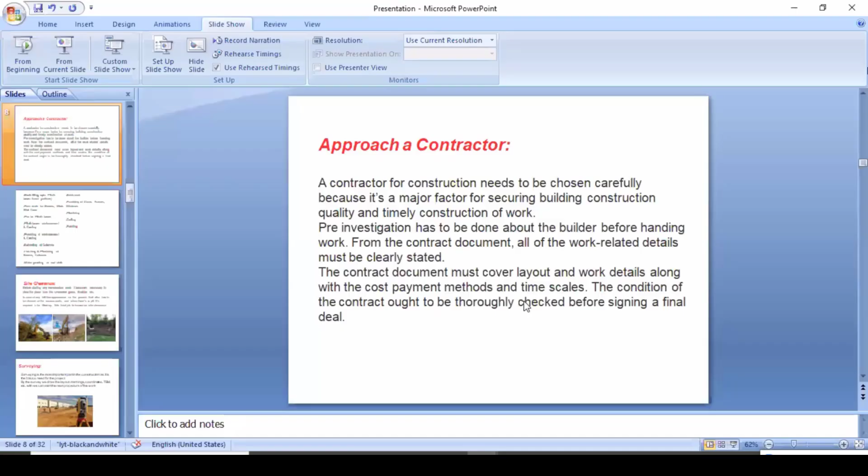So guys, before starting this session, let me tell you about civil engineering. What is civil engineering? It has different streams to go into after completing civil engineering. You have many ways to get jobs, right? Among them are structural engineering, architecture, interior design, and lastly, site work. So today we are going to discuss site-related works.

So how are we going to execute the work on site from the drawings given to us by the structural or interior and architectural team? How are we going to execute the drawing or plan given by them on site? Basically, when we are studying civil engineering, it's totally different from when we come onto the site. The IS standard will say we have to do some points according to this standard, but practically on site, some points you can't do.

Means you can't go through IS code when you're going practically. So sometimes you have to negotiate with this thing. So step-wise procedure I will explain you. Actually, this session is about piling foundations. So before starting the piling work, I will explain you what is the procedure before starting the work.

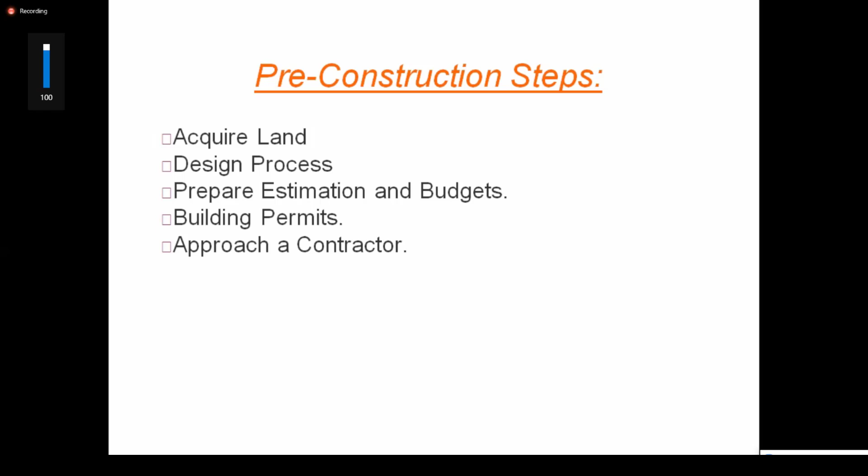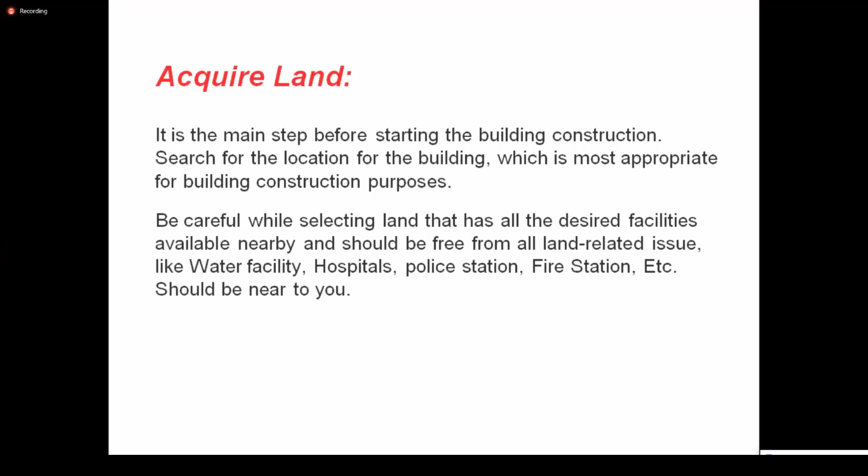So first, acquiring the land. Actually, it is the main step before starting the project. So here you will be seeing all the topographies, whether the land is proper for construction or not, whether the site is in good location, it is not in remote area. So what is the ground water table level, and whether it is near to the police station, hospitals, fire station, and your daily requirement needs. So as per the norms, it is properly suited to you or not.

After confirming your land, you will be going for design process. So after getting land, first of all, you will be thinking what I have to construct in this. So accordingly you will be preferring that land. So after that, you will be in the process of designing. So you will approach a structural engineer or an architect to get a design from them. So what are your requirements?

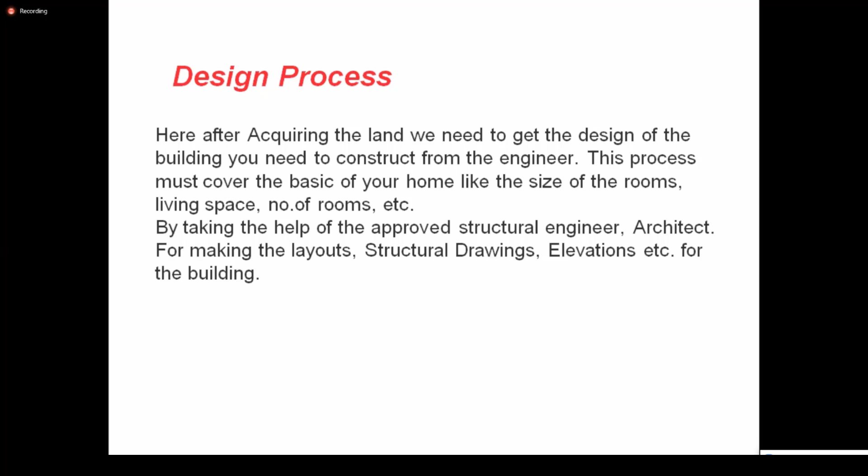For example, now you are going to construct a hospital. So for that, you need emergency services ward separately, normal OPD separately, and some general ward, everything. So for that, you need to approach a design. So you will be in total procedure of design. After that, the preparation of estimation budget, right? So you have decided to build a hospital. So for this, you have to estimate it.

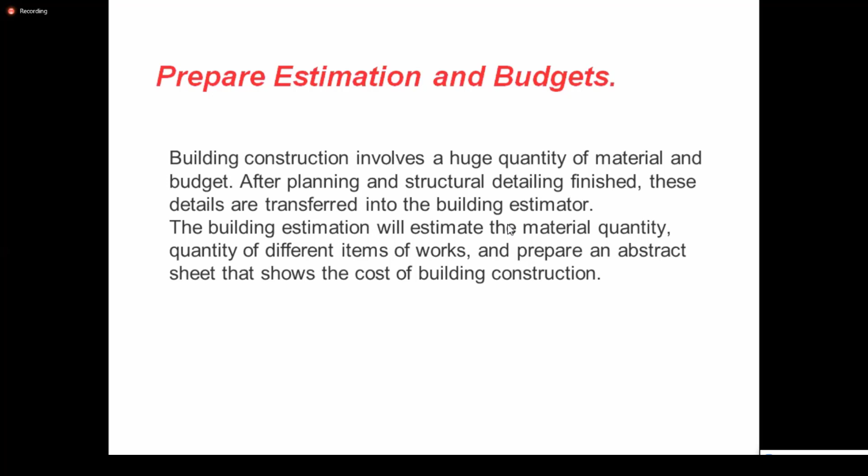Am I preparing a super specialty hospital or multi super specialty hospital or else ordinary hospital or some specialized, depending upon the variations. So whether I need to construct it in a 3-story building or a G+4 or G+5. So what is the estimation? What is the budget I have to put? According to the financial thing, you have to design, think and estimate it. Right. After preparation of estimation and everything, you will be going for building permits.

So why? Because before starting the construction, you have to get permission from the local authorities, like the municipal corporation, pollution control, airport authority, and police station, whether the land is proper to construct or not, whether the land is for construction purpose or for agricultural purpose, and so on. For that, you need some documentation.

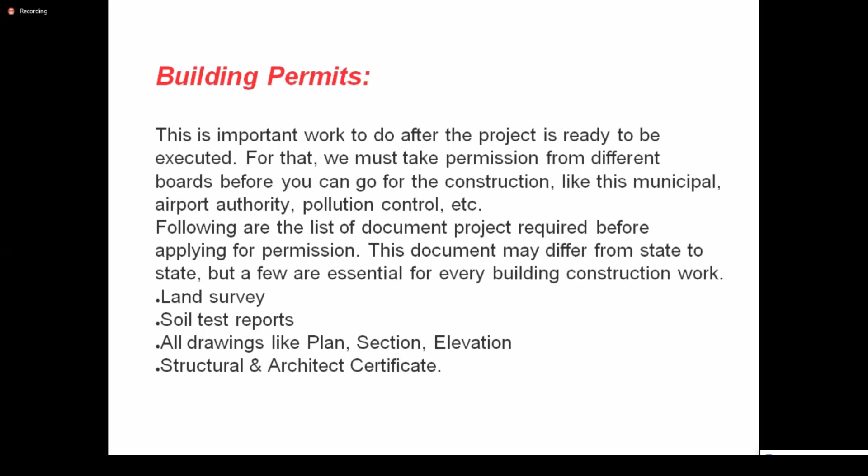Before that, obviously, you will be doing the land survey and soil test reports. In the soil test reports, you get the details of the land, whether it is good for construction or not, whether it is sandy soil, which is not good for construction. After that, all the drawings, as you already met your designer team, you will be showing all the designs, whether they are as per government rules and regulation norms and according to municipal norms. After that, showing all the documents to them, getting approval and getting all the permits.

Next thing you are going to approach a contractor. If you are building a small house, for example, your personal house, you will be going to a local builder or contractor and negotiating with him. Apart from that, for example, you are an employee from a company. By single you can't build a building. You need manpower. That means you have to get it from a labor contractor, to supply labor, to supply manpower.

Or else your company wants to give that work to a subcontractor. So you will be approaching a contractor to take that work, to clear all the documentation related things, to provide his own manpower. He will be seeing all the things if you are giving it to a subcontractor, right?

Meanwhile, in this session, is anybody from North India?

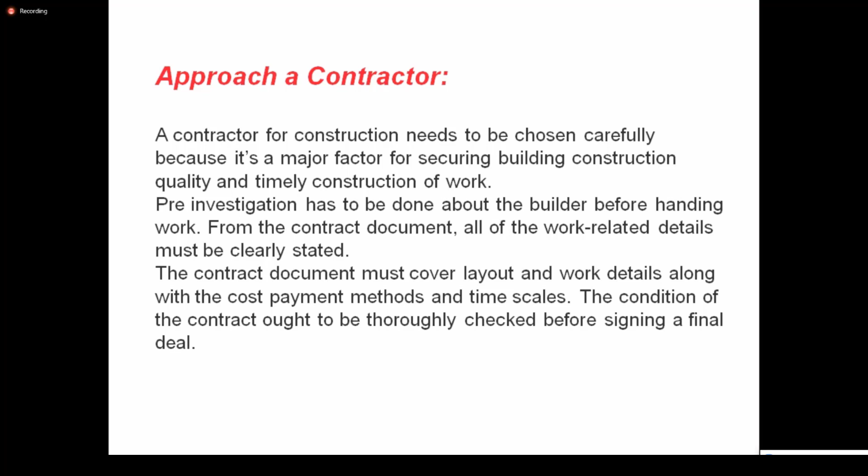We will be observing everything as a client. So for that you will be approaching the contractor, right? After that, the paperwork, everything has been done. Now before starting the construction, you have to clear all the documentation. That means you have to get clearance from the client.

Now you got a tender about some building. For example, for X building, you got a contract. That may be from a public sector or private sector.

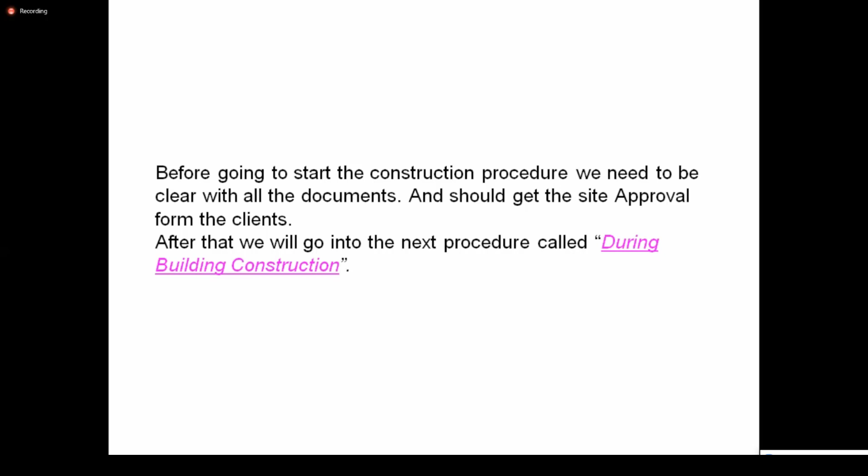Everyone will be choosing different streams, right? So after completing everything, you will be going into the building procedure. Before starting construction, you have cleared all the documentation and you got all the clearance from the client. Now you're ready to start the construction. So before construction, you need a site clearance. Up to now, you got clearance from the client: yeah, okay, you can go and start the work. So for constructing, you need a site clearance.

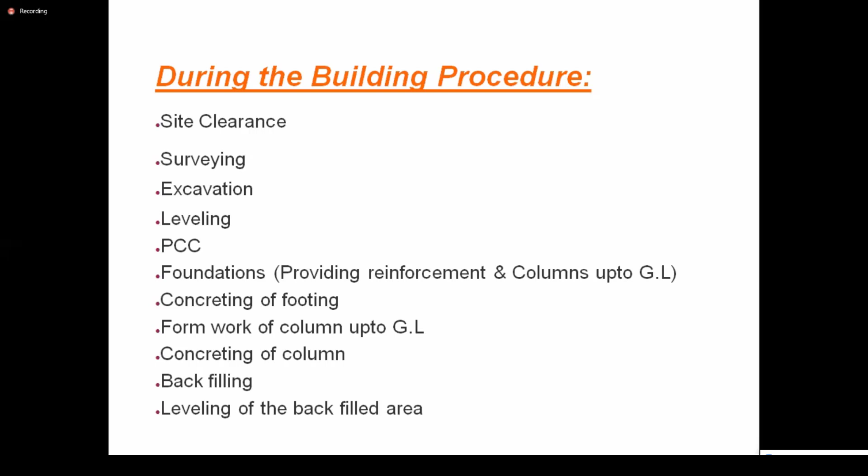What is a site clearance? See, the land you have chosen may be filled with debris or bushes, or some hilly areas, uneven surfaces like this. Can everybody see my screen now? So you can easily see. Sometimes 80 to 90% of clearance will be in the scope of the client. So the client will clear the site and hand it over to you to construct the building. Sometimes 10 to 20% of the site clearance will also be in your scope, according to the tender.

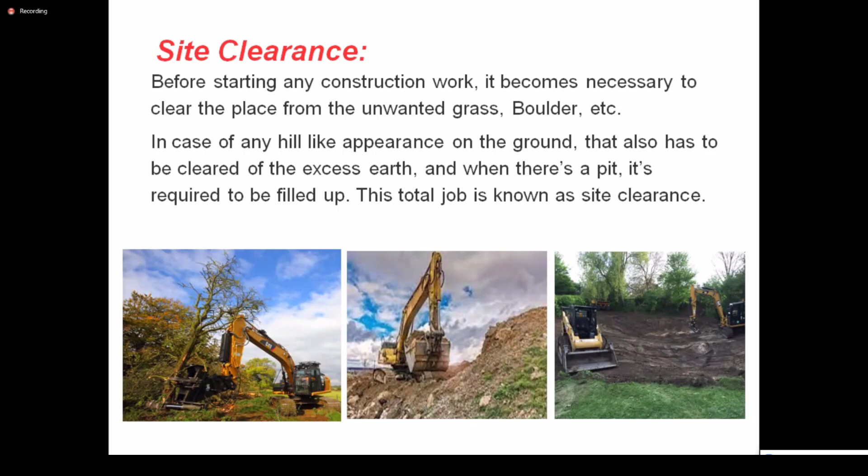After completion of site clearance, surveying. This is the basic and major part of the work of the building. So now, for example, we have taken a hospital. For example, you are constructing a small 1 to 2 story hospital building. For this, you no need to prepare a big layout.

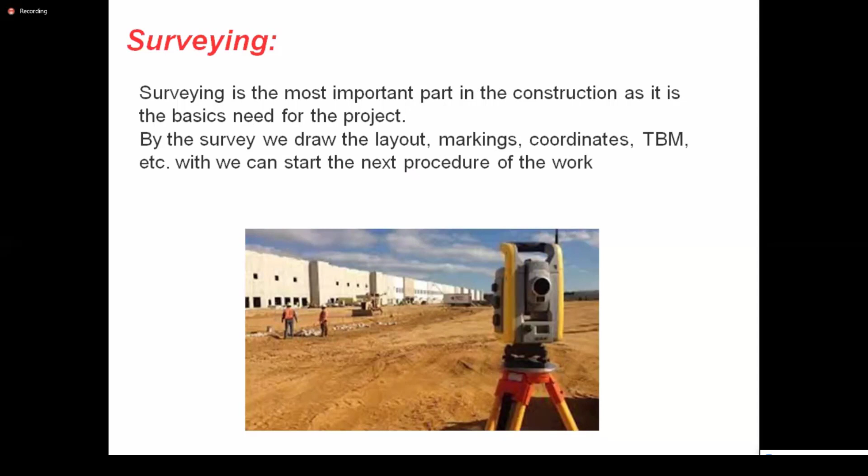Normally, you will be surveying and preparing all the layouts around the boundary and preparing all the coordinates. Right. So here, you will be doing all the surveying works, the basic requirements, like this layout, marking the areas, fixing the coordinates, getting the temporary benchmarks with the total station, obviously, before starting the work.

Because here a huge building is coming, some G+8 floor building, they are ready to construct. That's why they are excavating all throughout the layout. Normally for G+1, G+2, there's no need to excavate all those areas.

Simply you will be doing column marking, adding some working space to that column marking, and starting digging up to 1.5 meter, 2 meter, up to the required depth, and starting construction. So no need to excavate all the area, depending upon the building you have chosen.

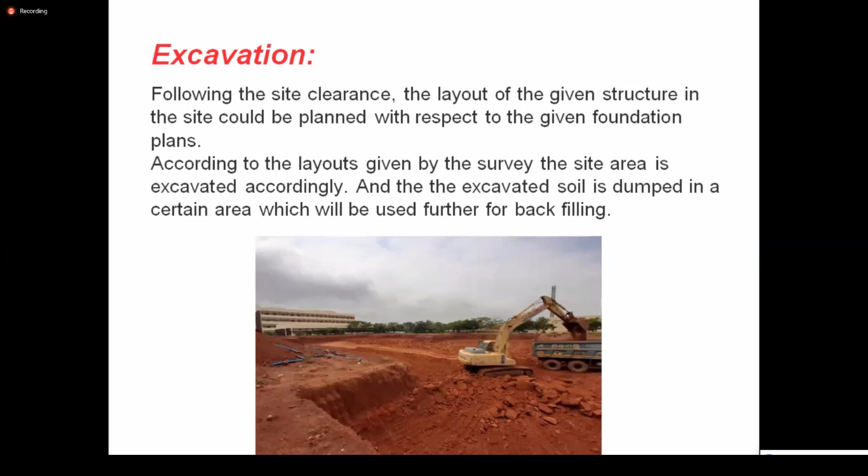After completion of the excavation, you will be doing the leveling. Leveling here comes in 2 types. For example, for construction of a hospital, the designer has said you have to excavate up to 3 meters, and from there you have to prepare a foundation and build the hospital. Up to 2.5 meter, you have excavated freely.

At that time, you have to be conscious. You have to look very carefully. You have to excavate properly at the ending of the layer, up to 3 meters. Here he is checking whether that area has reached 3 meters or not.

After that completion, you will be doing leveling. So now you have excavated the area up to 3 meters. After that, since you have done the excavating with an excavator or JCB, with machinery, you can't get proper leveling. Of course you will get some undulations, some uneven surfaces.

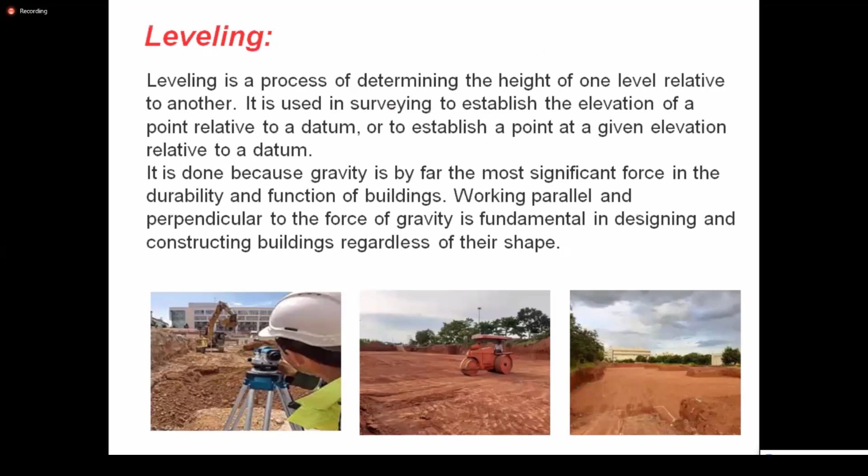So to avoid direct contact, we are doing PCC. As previously told, we have to do proper leveling.

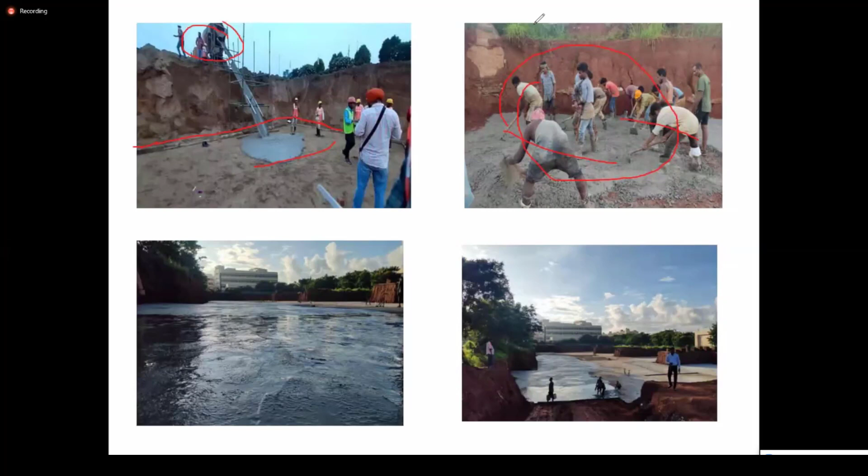Okay, after that we will go to the next stage. After completion of PCC, the next thing is column marking.

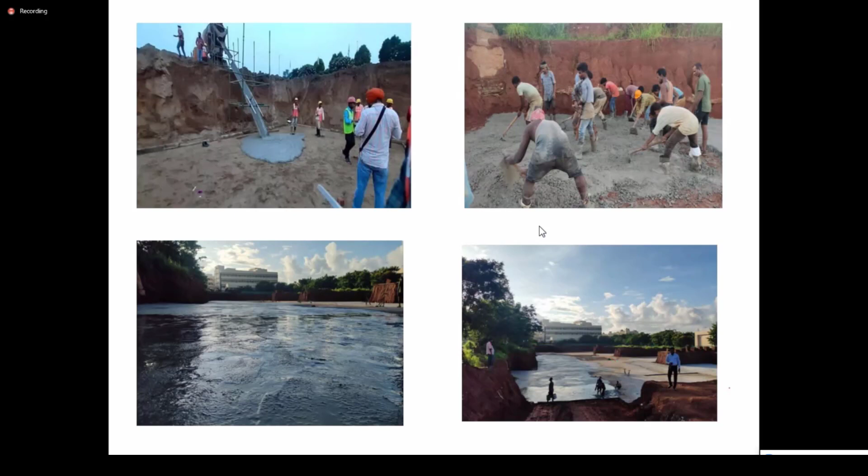You can see in this area, after completion of PCC, we will start doing column marking, marking where we have to place a column. After that, we will start for column marking.

So when we come to the foundations, again it will be divided into two parts. But before going into those parts, what is the foundation? Let's talk about foundations now.

Basically we need a basic foundation. This is the foundation. So in civil terms, what is a foundation? It is a huge structure, not necessarily huge, depending upon the structure. It is the main part of the building from which all the building loads are transferred to the earthen surface or to the soil. That's why it should be very strong and done with proper specifications.

So when we go into that part, it is totally divided into two parts: one is shallow foundations and another is deep foundations. Let's consider shallow foundations first. Shallow foundation is the foundation used to transfer all the building loads to the soil, or to the bearing capacity of the surface.

If the range of depth is increased, we go into deep foundations, which we will discuss later. So shallow foundations are divided into four parts.

One is individual footing or isolated footing, another is combined footing, the third is strip footing, and the fourth is raft or mat footing.

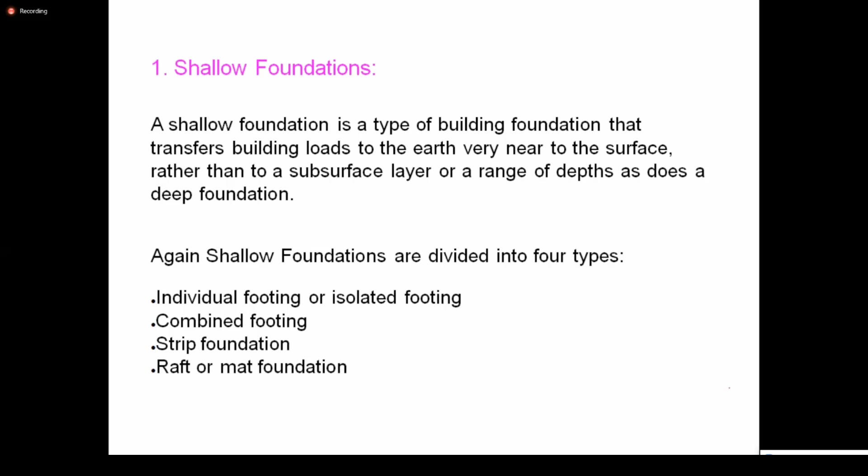Previously in the image, they were preparing the PCC, right? The PCC is for raft footing. Okay, let's go for individual footing. You can see it is individual footing, right?

So what is an individual footing? Individual footing is used for small structures of a building. As I told at the start, during surveying and excavating, if you are constructing a small building, no need to excavate the overall layout area. Simply you will be marking where your column is coming. So at that point only you will be excavating, and there you will start construction of the foundation. So at that time, this individual footing will be used.

After that, this is called individual footing. You can see it in the image.

See, this is an individual footing. This footing is prepared for a boundary wall. So here, from there, a boundary wall is constructed. Normally for individual footing, it will be coming the same for all the buildings. This is the same procedure for all of them.

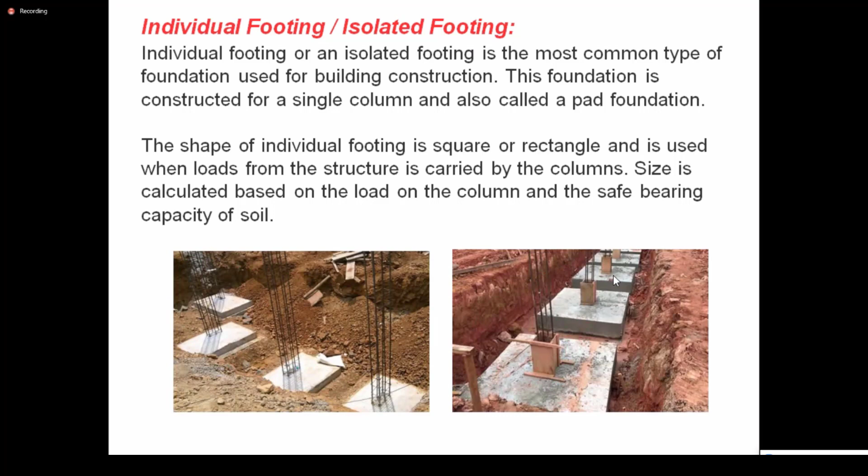So after that, coming to the point of combined footing. What is a combined footing? It is also the same, it will look like individual footing, but when you are getting columns from two or more columns, then it is called combined footing. It is constructed when two or more columns come together, that is called combined footing. That means the isolated individual footings are constructed combinedly.

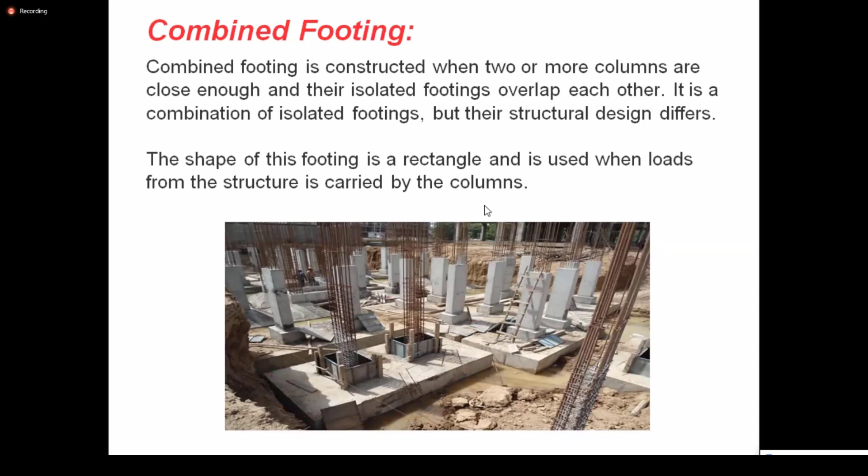After the completion of combined footing, you will be going for strip foundation. This foundation is constructed very rarely, especially where we have huge walls like retaining walls or bridge piers. For those things only we construct this strip footing. That means below the ground level we will be doing that, constructing a wall of up to 3 meters.

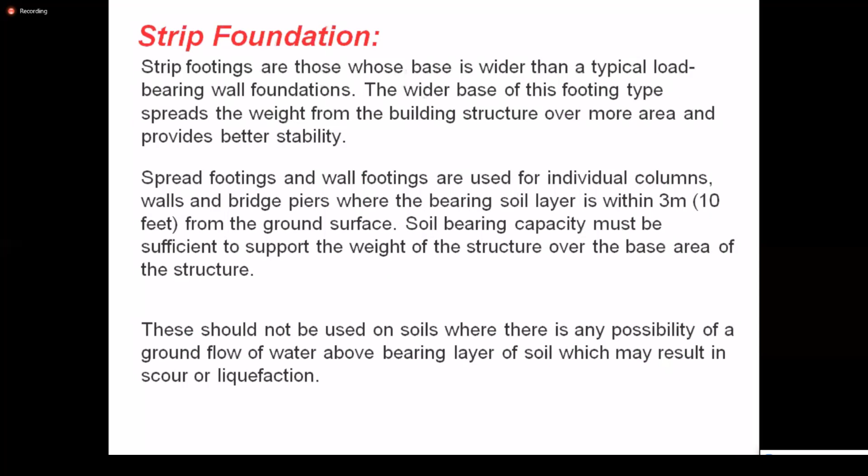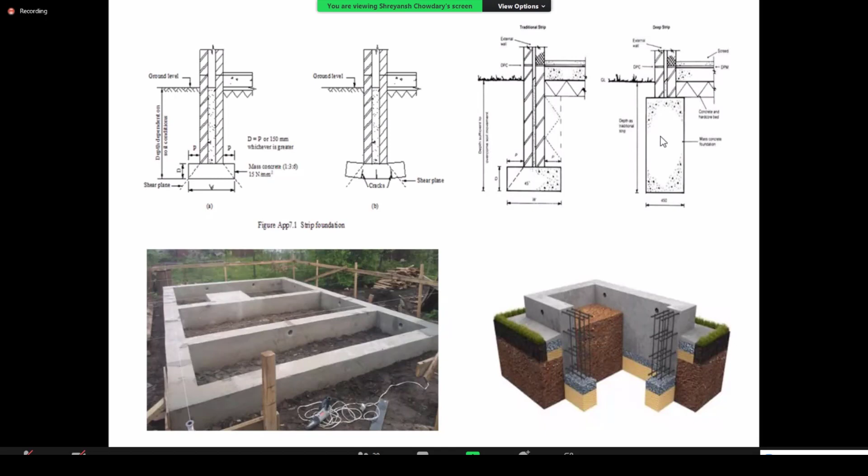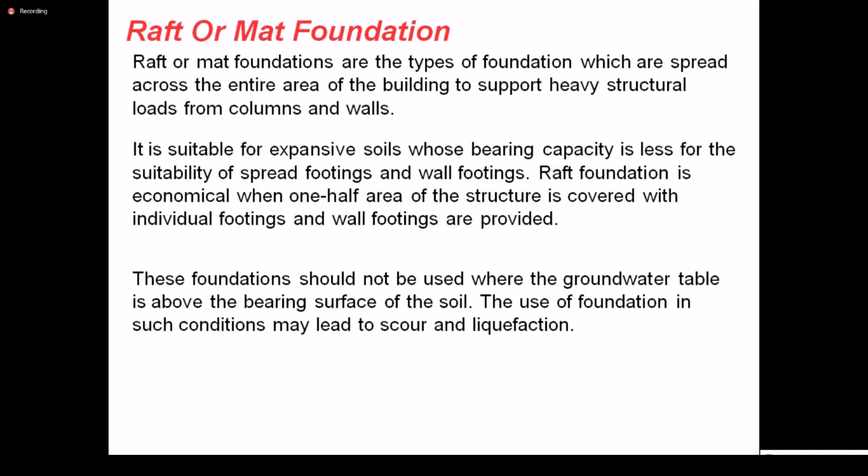At last, the fourth one, raft foundation or mat foundation. It is a huge structure, huge foundation used for big, taller buildings. For example, as I took the example of constructing a hospital, now we are using raft foundations because raft foundation is the biggest foundation, which can equally or uniformly distribute all the loads of the huge structure to the ground surface, the soil, or the earthen part with a low bearing capacity.

You can see, at the start I showed you they are excavating this area. So this is the area they excavated. After doing PCC, they're laying all the reinforcement. After completion, see these main bars and distribution bars. After providing all the reinforcement, they're fixing the column. After fixing, they will provide a pedestal footing and the huge structure of footing. See, here we already did this.

Basically this session is about piling only, so I will be explaining, but I will not go into a detailed explanation.

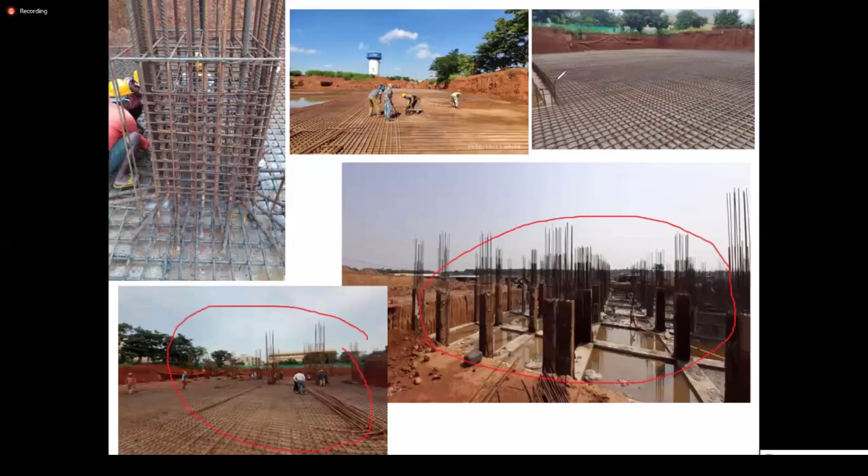After that, how to do the concreting of the footing.

Here they provided all these things. After completing all the reinforcement, after doing all the shuttering and everything, and after checking the surveying, the concreting work has been done. He is providing the vibrator, leveling these things, and checking whether it is going properly or not.

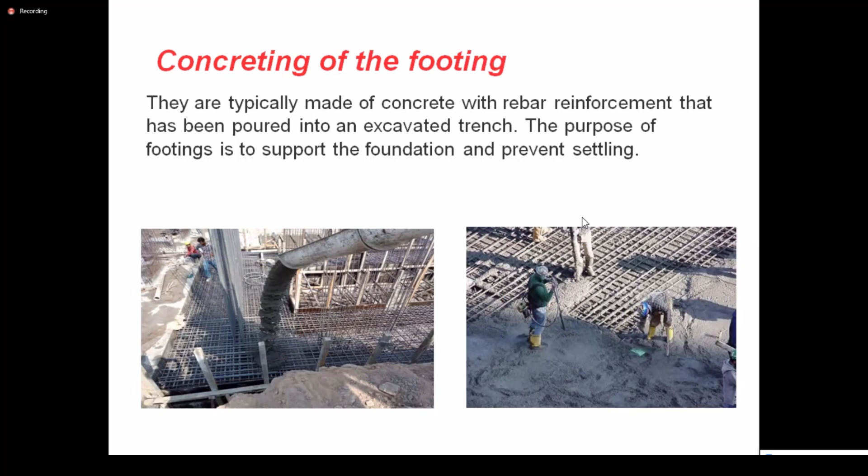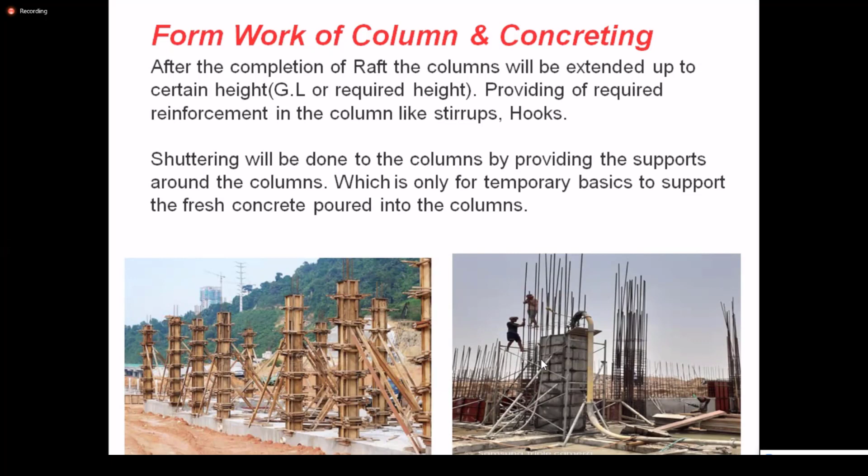After the mass concrete, see the formwork of this one, the formwork of the column and concreting, the shuttering part. Till now we did concrete for the raft. After that we will do shuttering for these columns and we will be doing concrete for this as well.

After completion of concreting of all the foundation footings and columns, again we will do the backfilling. The same soil that was excavated from that area is kept aside for further use, so we use that same soil for the backfilling.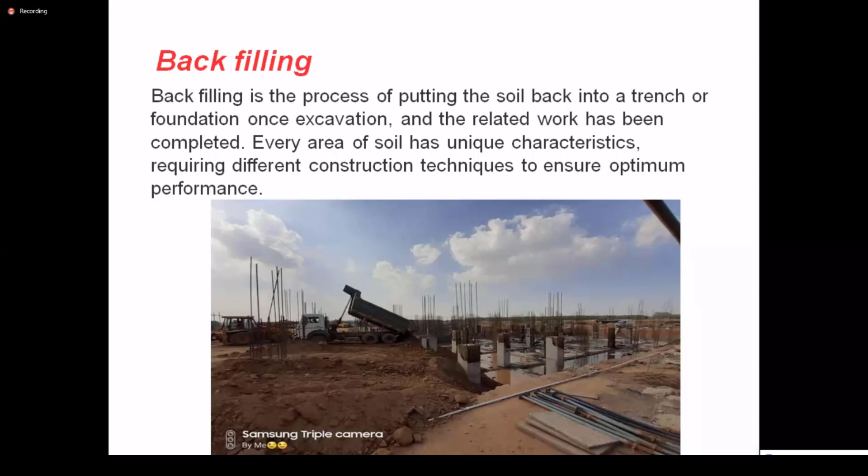After completion of backfilling, we will be leveling that area because once we have taken the excavated soil, again we are filling that loose soil. We have to fill it properly and we have to compact it in 3 layers. Without compacting that loose soil, you will be getting undulations and the building may get chances of cracks, right? That's why we are doing proper compaction within the 3 layers.

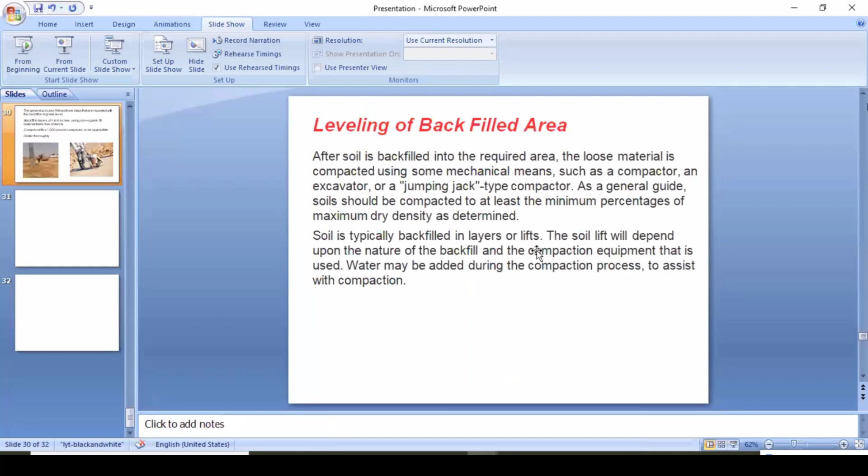So after this, we will be going into the deep foundations. As previously explained, foundations are of 2 types. One is shallow foundation, another is deep foundation. What is a deep foundation? When do we use deep foundations? When we select a site, we will be giving it for soil investigation, right?

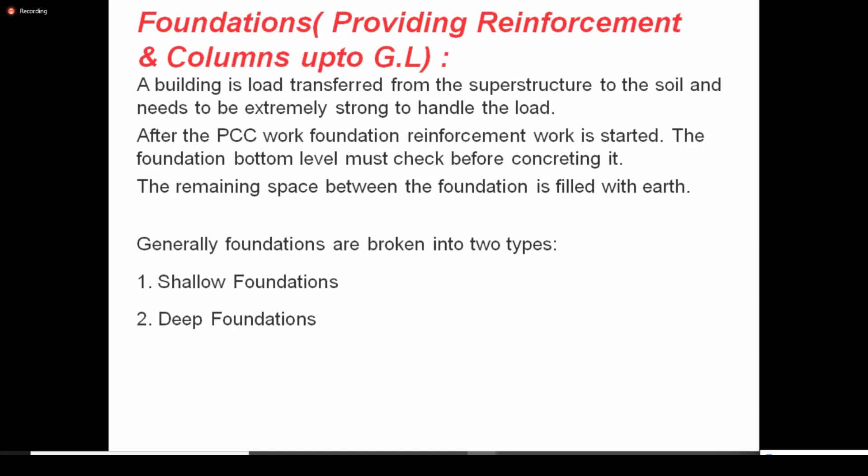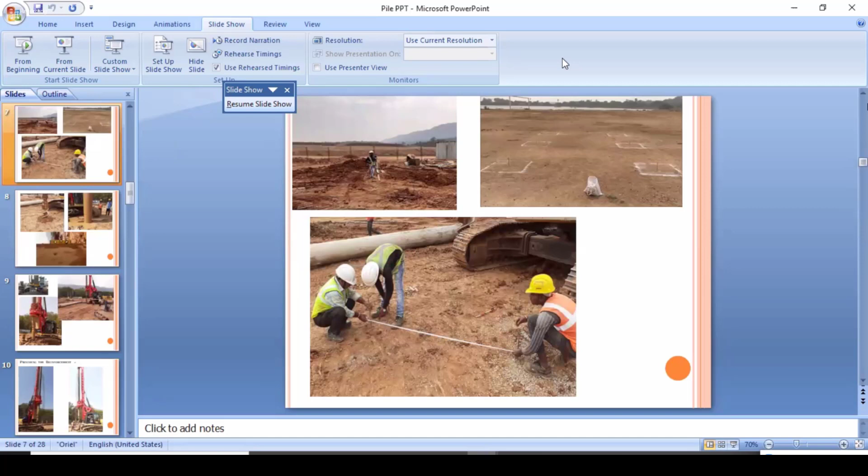So now we are discussing pile foundations, which is one of the most important and major foundations. So what is a pile foundation? It is a series of columns which are inserted into the soil to transfer all the huge loads from the building directly into the ground. Obviously, the piles are in a cylindrical shape. They will not be rectangular or square or triangular. The piles are circular cylindrical shapes, made up of a strong material, obviously that is concrete.

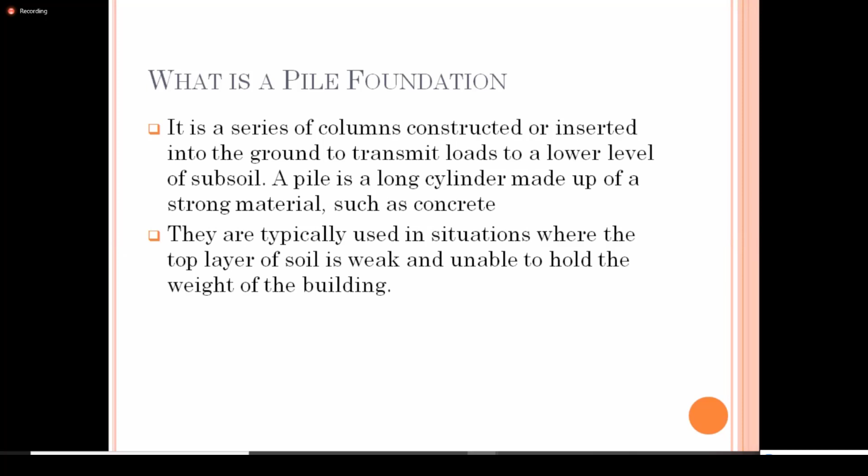So how to do this foundation? Actually, pile foundation is one of the foundations which is very easy. By seeing it, the process looks very huge, using very huge machineries, but the pile foundation is very easy. This is one of the costliest foundations, but it's very easy to do. Compared to the raft foundation, it comes very easier.

So again, pile foundations are divided into 2 parts. One is end-bearing piles, another is frictional piles. The procedure for both piles is the same. Let me explain clearly. What is end-bearing? In the name itself, it is written end-bearing. That means the tip of the pile, the end part of the pile, will be stopped when the hard strata or rock comes at the bottom, at the end of the pile.

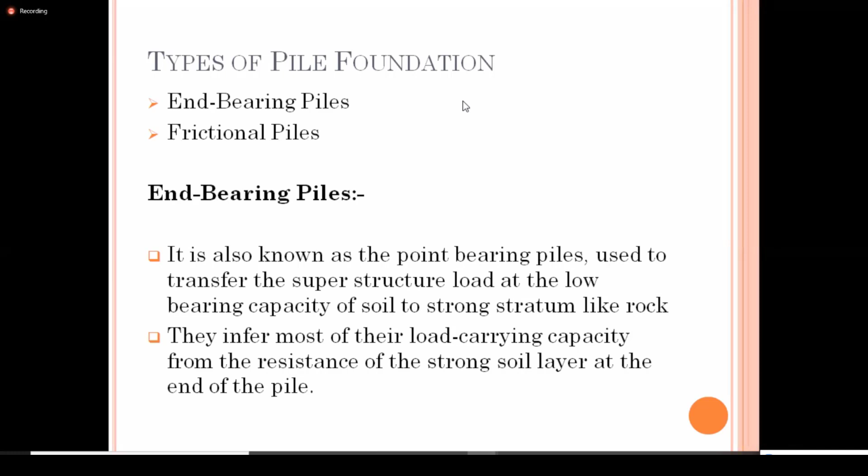Right. So, for example, we'll take a crowbar. In Telugu, that is gunapam. That long steel structure will be there. Gunapam is right. In Telugu, we will say gunapam, and in Hindi it's called sabbal.

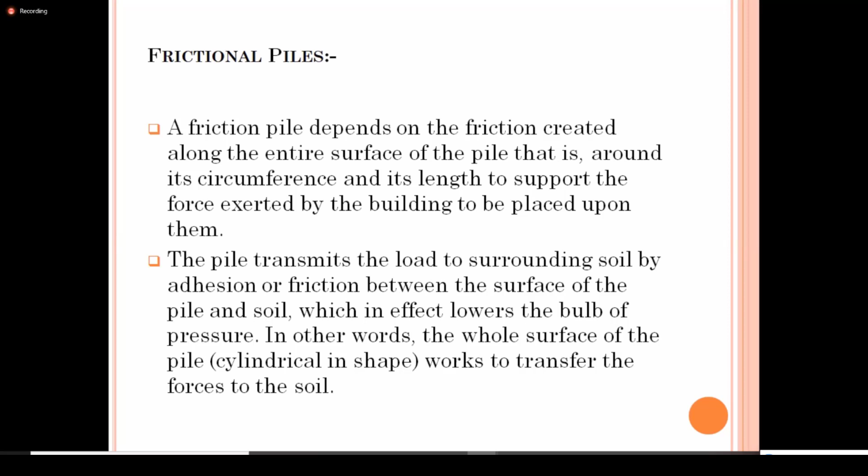So when we are planting a plant, when we are doing a plantation, we'll dig the soil up to 200 mm. The crowbar will be coming up very easily. After going into depth, it will become somewhat hard to pull it up. Is it or not? Because it's becoming difficult. Why? There is friction between the soil and the crowbar. That's why it is somewhat difficult to pull out when it is going to a certain depth.

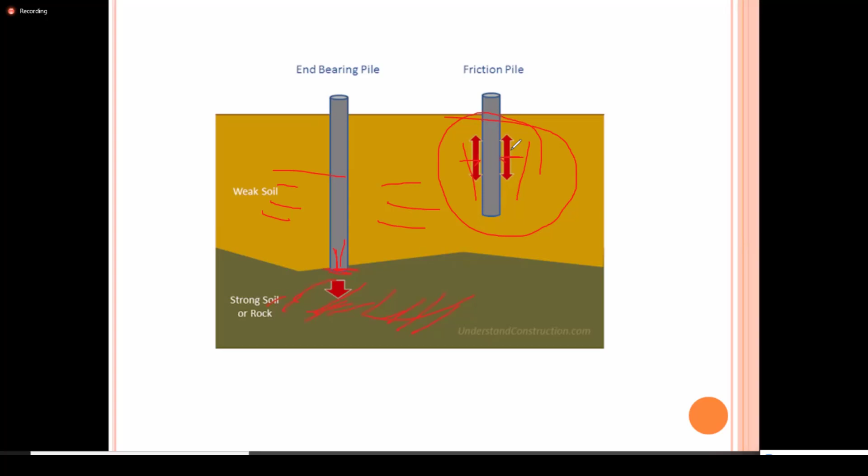because here there is friction between this soil and this pile, which resists pulling it out. Right. It is totally depending upon the friction only.

For example, deep foundations means you will be going up to certain depths like 30 meters, 45 meters. If you are constructing a bridge or a flyover across the river, you have to go for deep foundations like well foundations or pile foundations. According to the budget you will be choosing.

So in piling also, you can't always go until the rock is coming. You went to 30 meters, rock hard strata didn't come. You went to 40 meters, hard strata didn't come. So before starting the pile work, you will be doing one soil investigation. The team will be coming. They will be drilling a bore with a small drill bit, 150 mm dia, and with that they will be drilling the hole.

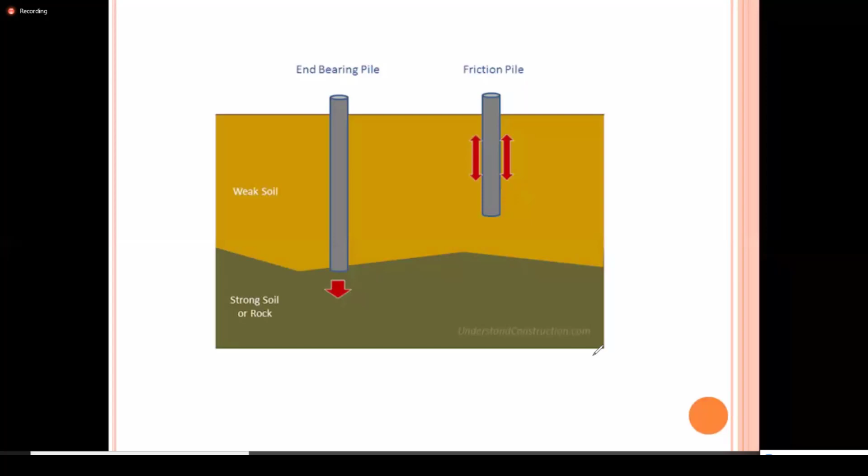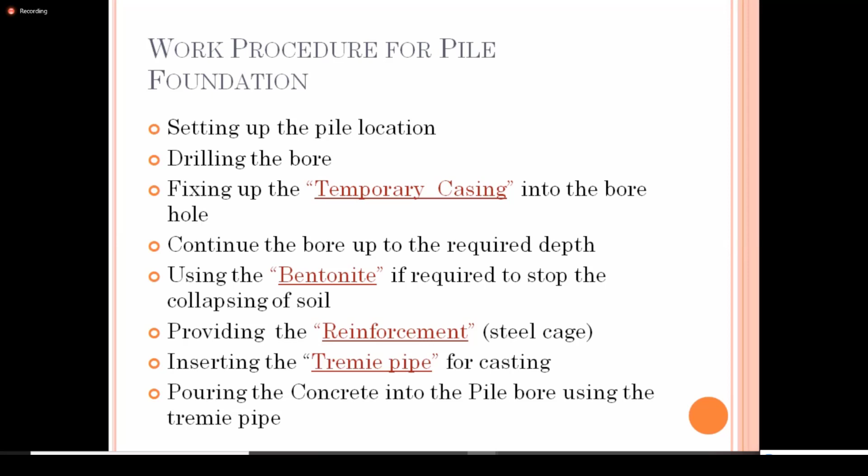After that, what is the work procedure of piling? Same thing as explained to you previously. You do site clearance, the surveyor will come and mark the point. See here, the surveyor is surveying with his total station and he marked some pile locations.

After marking all the pile locations, the rig machine will come. Let me show you the photos of the rig machine. See, you can see this one. This is called the hydraulic rig machine. It will be chain mounted or truck or tractor mounted. Depending upon the work, they will be taking the available machines.

See, this is the rig machine. It will be moving with the center of gravity. The machine will be totally moving in the center of gravity. Inside of that, they will be having two water bubbles. One is in the digitalized screen, another one is at the bottom. So with the center of gravity that machine will be moving, because see how much drill bit it is having. So they have to move with center of gravity only. So now you are clear with what equipment they will be drilling.

So here I marked a point. I got the rig machine. Now he's ready to drill. So before drilling, I have to check whether the point is in the middle or not. Because in total station, while doing the survey, he's catching a peg that is having a slim point.

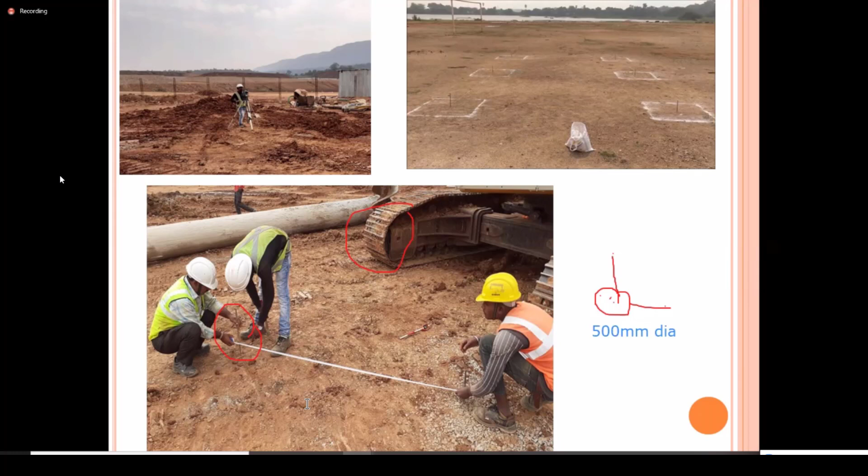Just a second. Just a minute.

So we have considered this as a pile. This is one point, this is one point. Root of a square plus b square, that means 1.5 whole square plus 1.5 whole square. So we will be getting around 2.1 something. So we will check whether from here to here that value is coming or not. If it is, that point is perfect. See, these guys are checking that only.

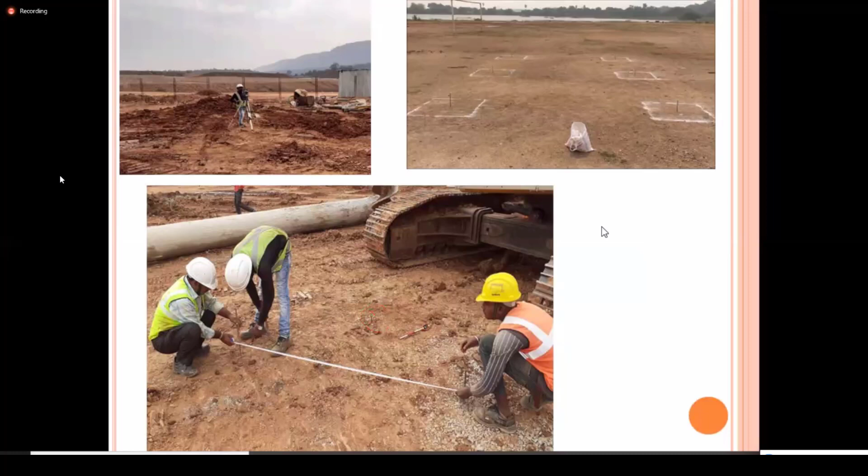See, from the triangle, he is taking from here to here. Actually, they have one other point. You can see it clearly. He already took another point from here. So he's checking with the diagonal formula whether the point is perfect or not. After completion of checking cross sections, the pile rig will come and they will start drilling.

After drilling up to 5 or 6 meters, they will put a casing. So what is a casing? Casing is a cylindrical equipment which is used to keep the soil inside from collapsing. At ground level, up to some depth, 2 or 3 meters, the soil is soft, so it will keep on collapsing when he's drilling.

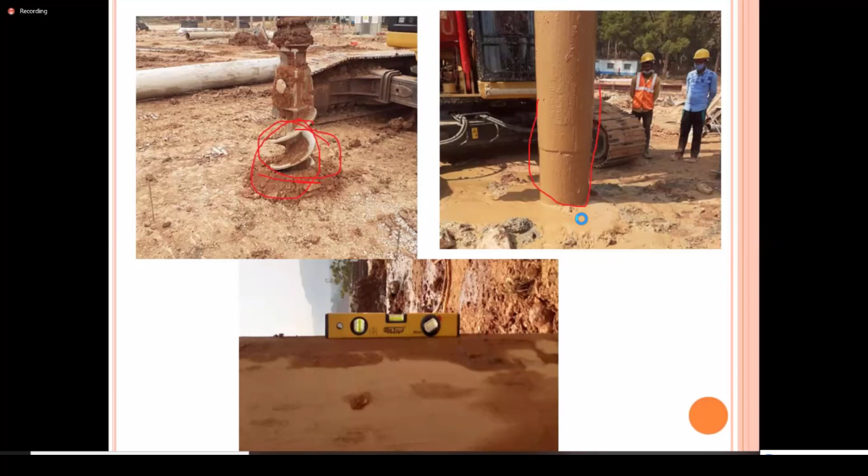So what they will do is, after going to a certain depth, the casing... let me show you some pictures of the casing. See, you can see this huge cylindrical structure. This is called casing. It comes in different sizes, 5 meters, 6 meters, 7 meters, 9 meters. Depending upon the requirements, they will bring the material to the site team.

So after drilling the soil up to 6 meters, they will provide a casing. They will insert a casing inside the ground level.

Sir, after that, some background news is going on. News, sir. A minute. Now clear, sir. Now clear, sir. Thank you, sir. Okay, no problem.

So you understand what I am saying to you. Basically, with piling you will get proper experience when you see it with your naked eyes. So I'm trying my best to explain it to you, because without seeing you can't get it properly. That's why I'm showing you with pictures. I haven't kept any matter in this. So I will show you something.

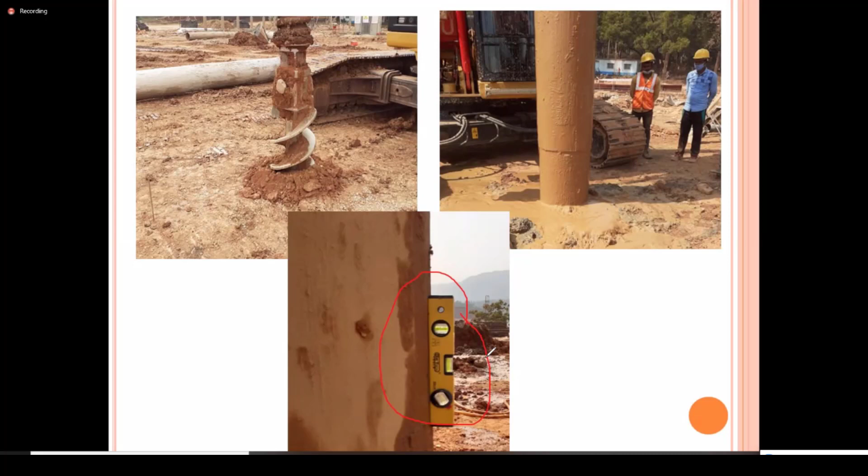So there is no use. So while inserting the casing, we have to check thoroughly whether the casing is going straight into the ground level or not. So after fixing, you can see it. The casing has been fixed. See here, he's inserted the casing into the ground level. After that, he started drilling.

See here, there are two types of auger. I will tell the names of this instrument. This entire thing is called a drill bit, and this is called an auger. There are two types of auger again. This is a rock auger and this is a soil auger.

The soil auger will be used in the starting strata, because on the top you will be getting soft soil. For cutting that soil, they will be using this auger. When the hard strata or rock comes, they will be using the rock auger. See here, you can see some bullets. But I will clear it.

See, you can see the bullets on that auger. It will be used to cut the hard strata or to cut the rock. For that they use these bullets on the edges of this auger, on the sides. And this one is a bucket auger. See, this is called a bucket auger.

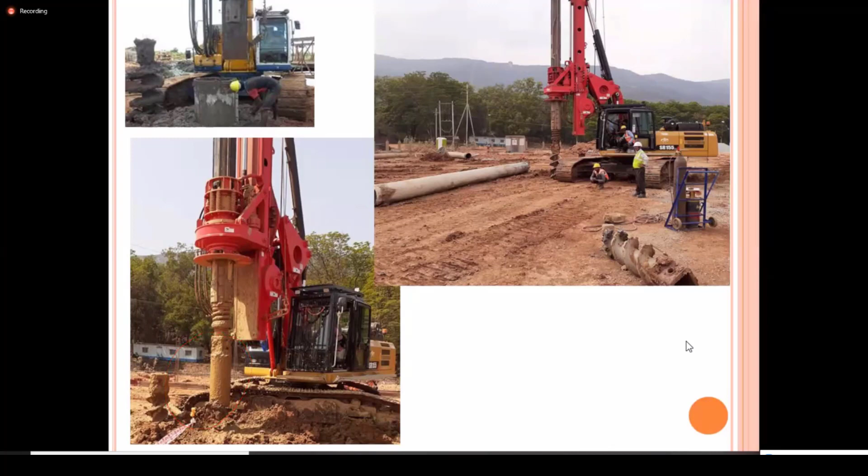See, after completion of boring, we are providing the reinforcement into the borehole. So you can see this area, the total pile cage. In normal shallow foundations, the person will come, take the steel and tie it there itself. He will fabricate everything in the ground only, because it is on top of the surface. But here we are drilling the bore inside the ground. In that borehole, the person can't go inside. That's why it will be prefabricated on the site.

We will be prefabricating this reinforcement and inserting it inside the bore. By this rig machine or by using some crane, we will be holding this entire pile cage and inserting it inside the borehole. Right. After inserting the pile cage, we will be doing some fabrication work. As told earlier, you may get a thought, sir: we already did the prefabrication on the site, then why are you doing the fabrication?

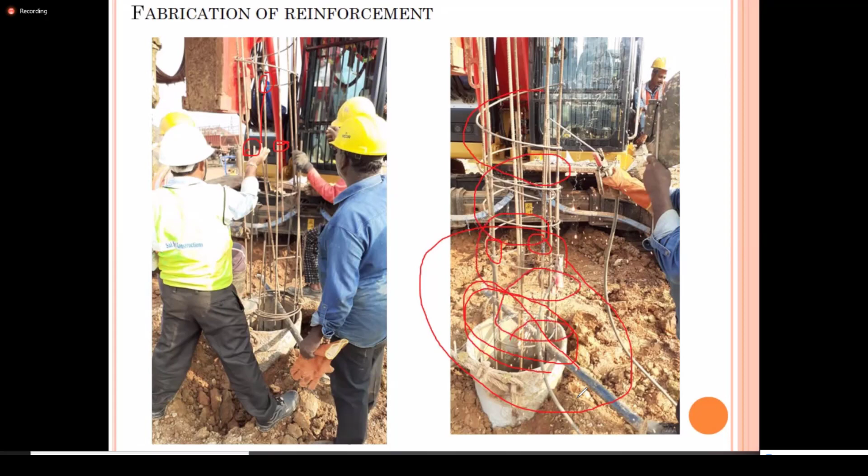After completion of all the welding works, in the previous photo also...

See, first he inserted one cage. At the top he kept some support so that the pile doesn't go in fully. After that he took another pile cage, and now he is fixing here. You're getting my point, right?

Hello? Yes sir. Yeah, okay, thank you.

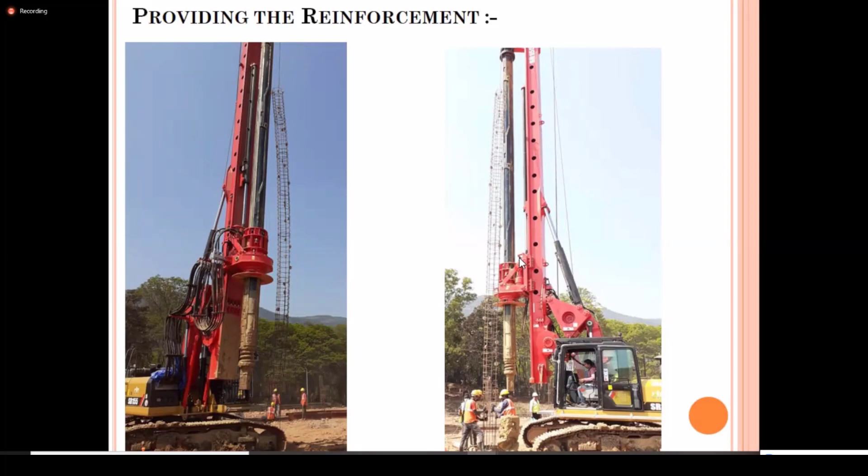After inserting the pile cage, I will be inserting the tremie pipe. So here the question again comes, what is the tremie pipe? Previously I showed that while doing casting of the raft, one person is vibrating to get proper compaction of concrete into every part of the reinforcement. They are doing vibration, is it? So here we are going up to 20 meters depth, and there we can't put vibration. We don't know how they are doing vibration and everything down there.

So they use a tremie pipe, which is a pipe used to pour the concrete inside the borehole. According to IS code 456:2000, there is a rule to pour the concrete: it should not be poured from a height of more than 1.5 meters. Let me clear and explain in normal language.

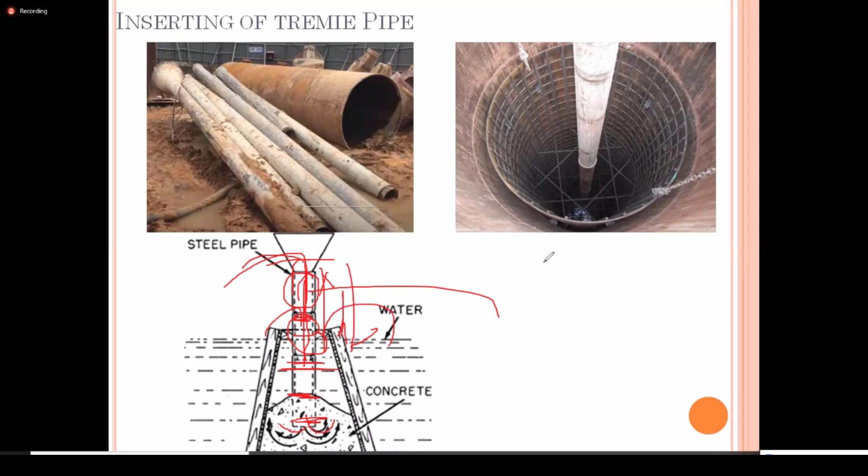Let me show you another picture. You will be getting one clear information. See, in this method they are pouring.

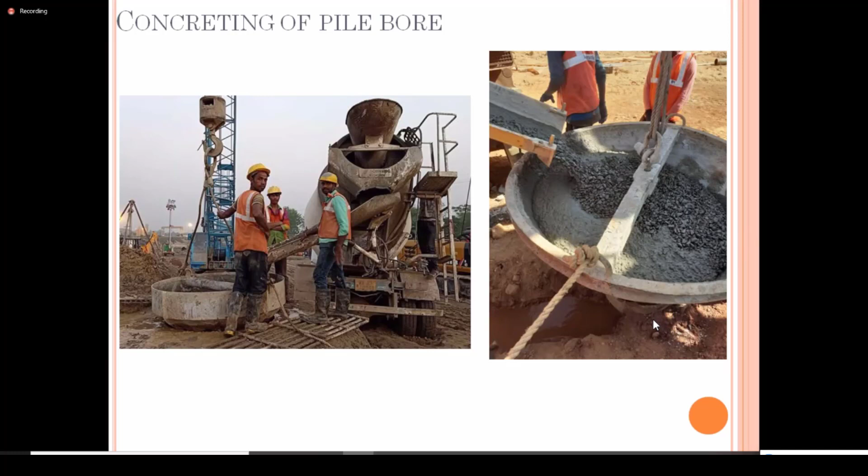We will be doing some tests on piles. In doing tests, we do two tests: one is the initial load test, another is the routine load test. You can write it down.

The initial load test gives 2.5 times the design load. For example, a designer has designed for a hospital some 100 tons of load. So I will give the load on that initial pile around 2.5 times that load - that means 100 into 2.5, so 250 tons of pressure load I will give on that initial pile.

For the routine pile, I will select one pile from a group of piles that has already been done, and I will test it at around 1.5 times the load - that means 100 into 1.5, that is 150 tons only I will give.

The initial pile is done at some other place on site only - they will take a separate area to do that pile. After doing the initial pile, we will not use that pile for construction of the building. That's why we keep it separate, out of the main site.

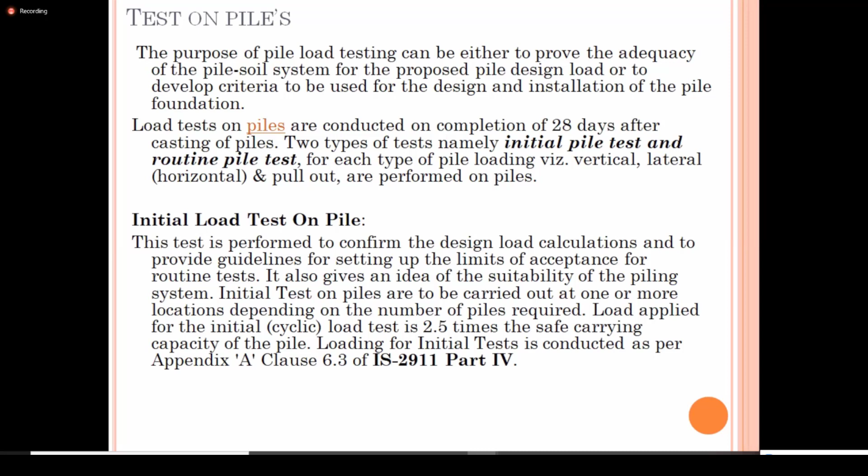After completion of initial and routine piles, again there are different types of load tests. For doing the initial pile, we have three types of tests.

One is compression, called the vertical load test. Another is the lateral load test. Another one is the pull-out test. I will show some images - these three tests are done on both initial piles and routine piles.

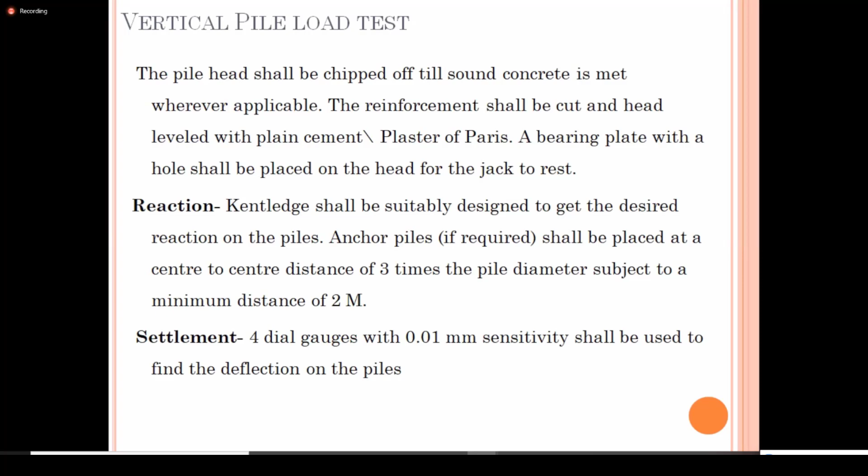So this is the vertical pile test. I will show you - they will be filling jumbo bags, putting some girders, and on the bottom they will fix one jack.

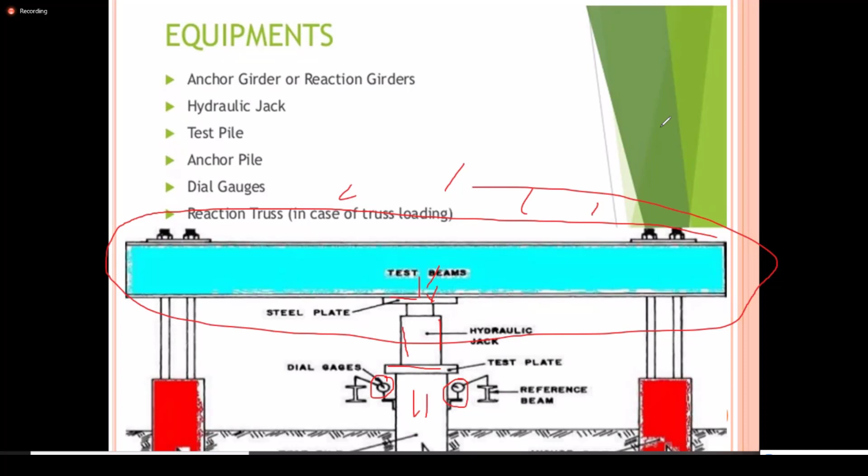Let me clearly explain. This is the beam - on top I will put some loads. This is the pile, and I will place one test plate. After that I place one hydraulic jack - this is a steel plate, and this hydraulic jack takes all the load from above. After giving the pressure, I get the deflection readings here, showing how much the pile has deflected. So this is called the vertical test.

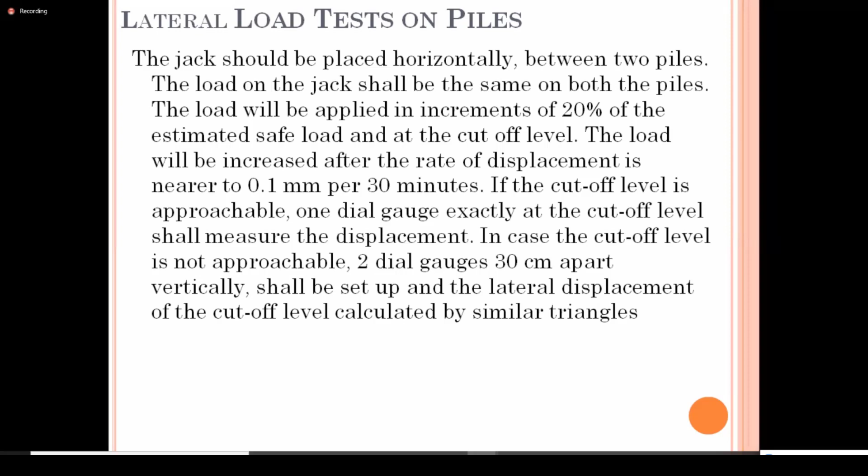After that is the lateral test, that is horizontal. What I do is take two piles, and I put a jack between these two piles horizontally, so I get force here.

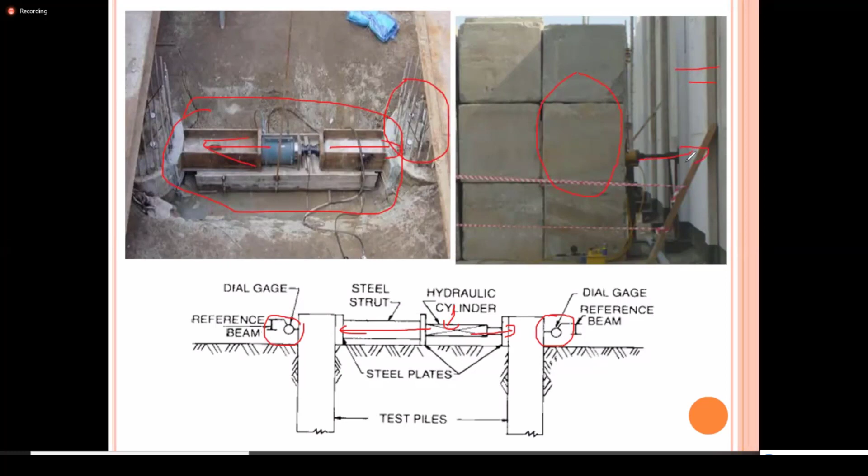So these are the three tests which should be done on a pile. Basically, first, we have to do two types of tests. One is initial test, another is routine. Initial means we will not be using that pile, but we are just testing it. After that, from a number of piles we will be choosing one pile, and in that one pile we will be testing whether all the piles have been done properly or not.

That is the routine pile. Again, while testing for both initial and routine, the three tests will be divided. That is the vertical load test, which is compression strength. After that, lateral, where we will be giving horizontal force. Another one is pull out.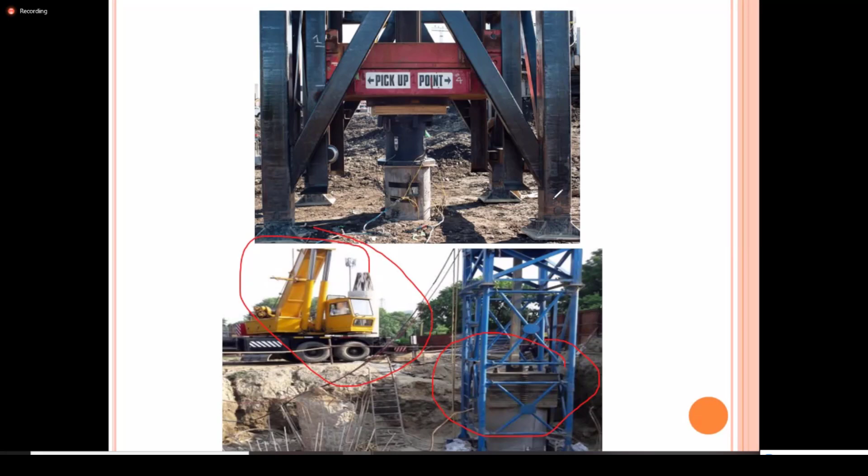Okay. After the completion of piling, pile cap works. That means I will excavate the area. See, I had already marked this area. Doing excavation around the pile. After excavating, I am chipping this pile. See, this person is chipping all the area. After the completion of chipping, you can see here, I will be clearing the ground surface and I will be leveling everything.

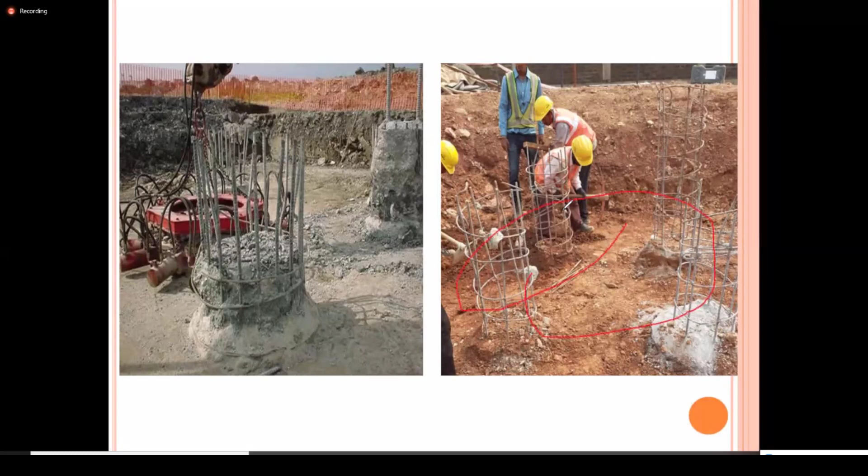After that leveling, in number of groups, I will be providing PCC.

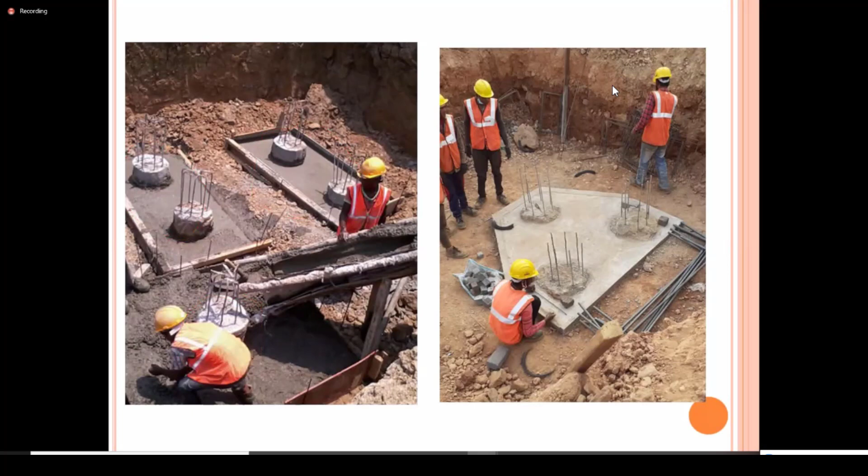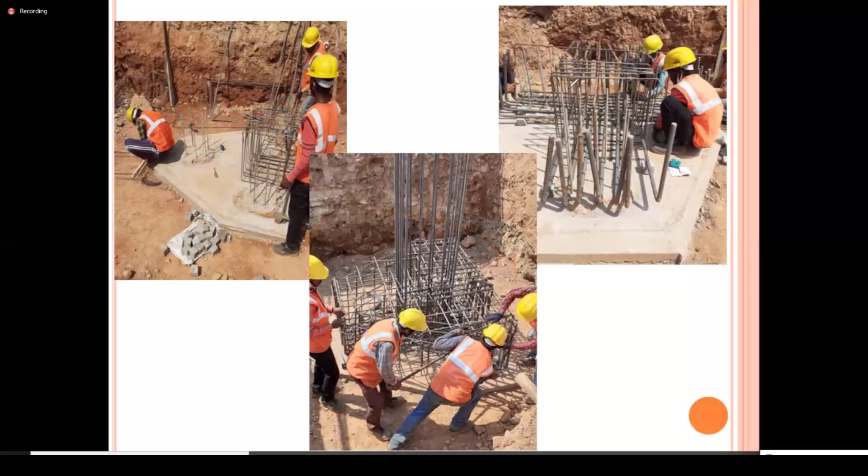See, I'm fixing the reinforcement on the pile cap. After the completion of reinforcement, I will be doing shuttering. After shuttering, the surveyor will check the point whether the shuttering is done properly or not. He is a surveyor. This is the pile cap. We are giving proper support to them.

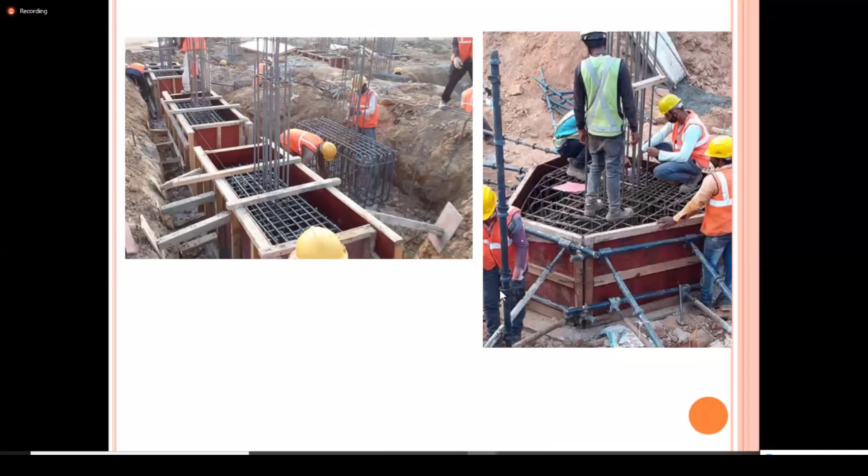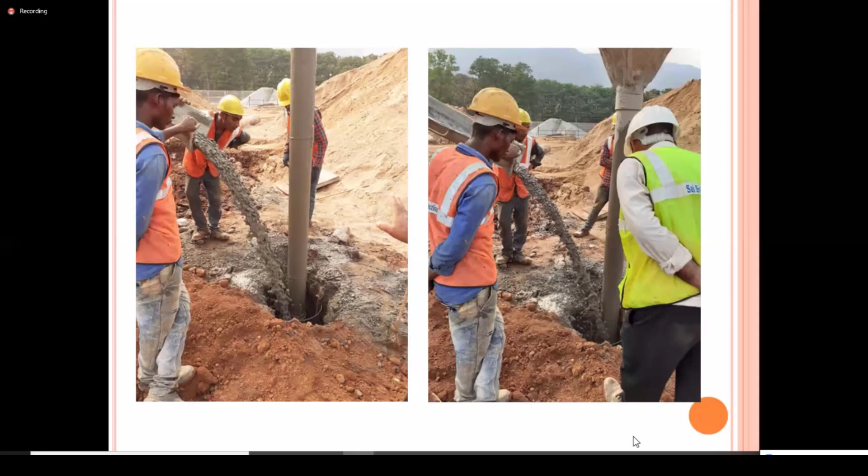Sir, can you please go to that particular page where you shared the procedure for pile foundation? I'll take one snap, sir. Which one? Wait a minute. Procedure, sir. For pile, which one? Pile foundation. This one, sir. This one, okay, you can take it.

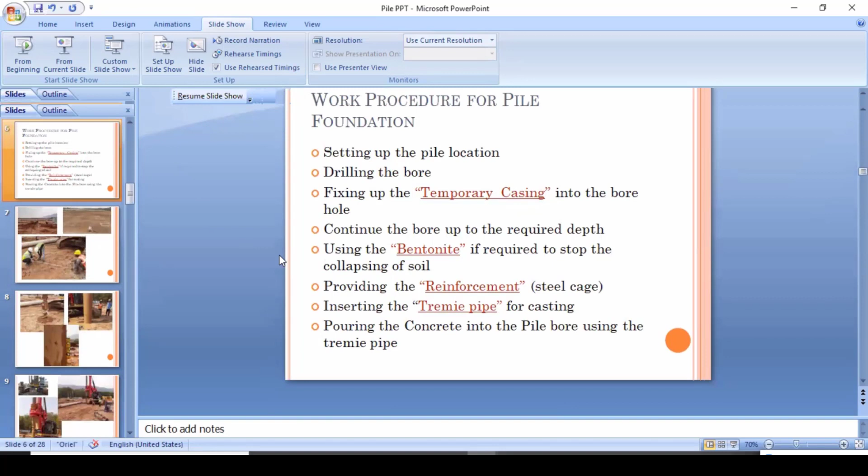Sir, thank you so much for the detailed information you've provided. You made it very clear and detailed. I just want to confirm whether you got some information about this piling or not.

Actually, piling will be very easy to understand while seeing it. No one needs to explain it to you. If you are seeing this procedure, nobody needs to explain what is happening. By simply seeing, you can understand what is going on in pile foundations.

When coming to raft, someone has to explain why we are providing this reinforcement, the spacing, overlapping, the BBS, bar bending and everything. Someone has to explain, but piling is the one foundation where nobody needs to explain what is happening inside.

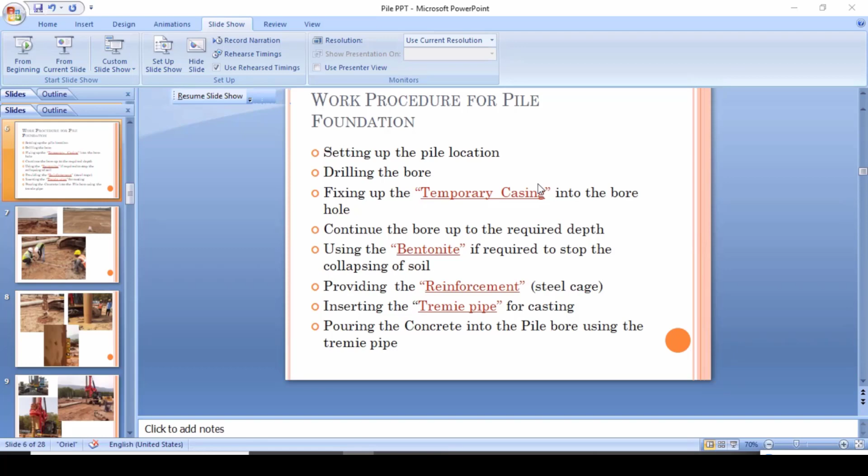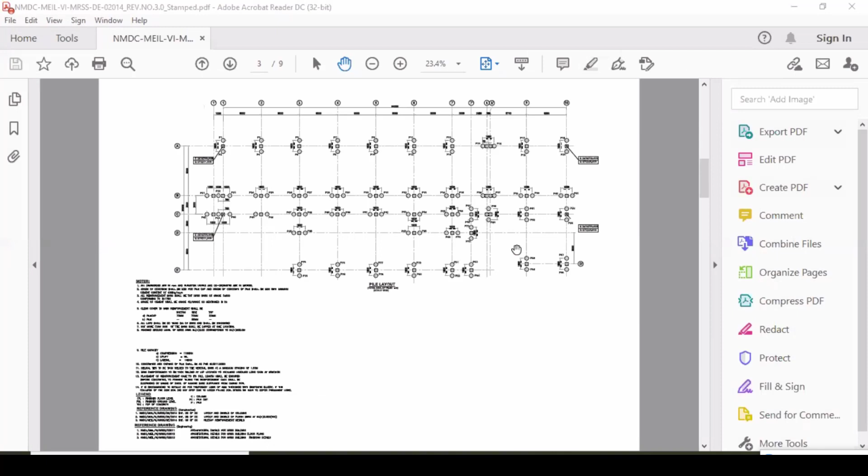Is it? See, after that, I will show you one small thing. Sir. Hello. Sir? No, sir. We will place the casing to remove the soil stratum. Can you wait just a minute? See, while doing piling, sir, sorry for the interruption.

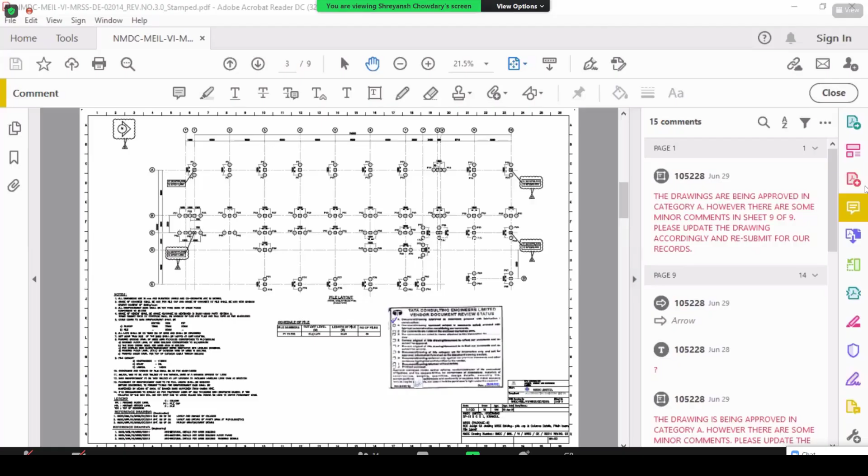So can you give me 2 minutes? I will show you. See here, these are the recent drawings. So the next pile I should not do in this area. I have to do this one or this one. After completion of 48 hours, I have to do this one. Why? Because there is a difference of only some 1.5 meter, 1.8 meter. If you're doing them at the same time, both the boreholes will be collapsing.

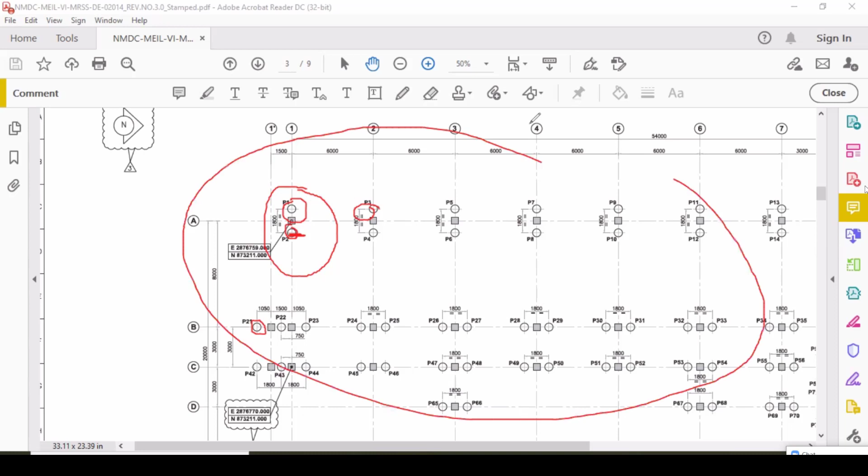So for this reason, see, these are all the group of piles, right? Today I did P1, pile 1. So next I will go for pile 3 or pile 4 or pile 21. But I will not go for pile 2 because there is a chance of soil collapse, the concrete will collapse and the pile bore will be wasted, and we can't use it. So this is one of the major points we have to remember while doing the piling as an engineer.

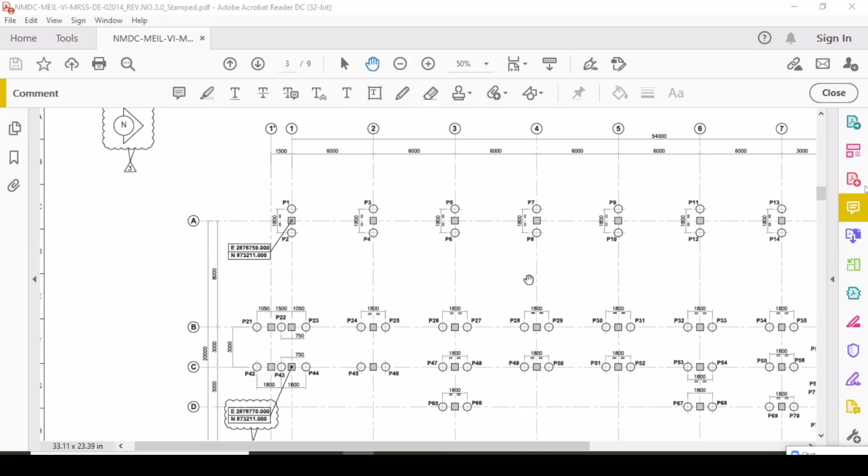So apart from this, is anybody having doubts regarding pile foundations or any other procedure? Sir, one thing. Yeah, tell me. If in case, due to rain or any other problems, the pile bursts, we need to change the particular place, sir. So the plan will change based on that. Am I right, sir? No.

They will take necessary precautions. If suddenly the rain starts, they will stop piling. And they will take the drill bit outside and cover the casing with a lid or plate so that rain does not enter the bore. They will close it immediately. There is no chance of the bore collapsing. If the bore is collapsing, they will drill it again. Nothing will happen since casings are provided.

If the bore still keeps collapsing, listen everybody, they will be using something called bentonite. It is a brownish colored powder. They will mix the powder into water and pour it inside the bore. The bentonite will act like Fevicol or Dr. Fixit, like the waterproofing agent we use. So the bentonite will tighten the loose soil and stop the borehole from collapsing.